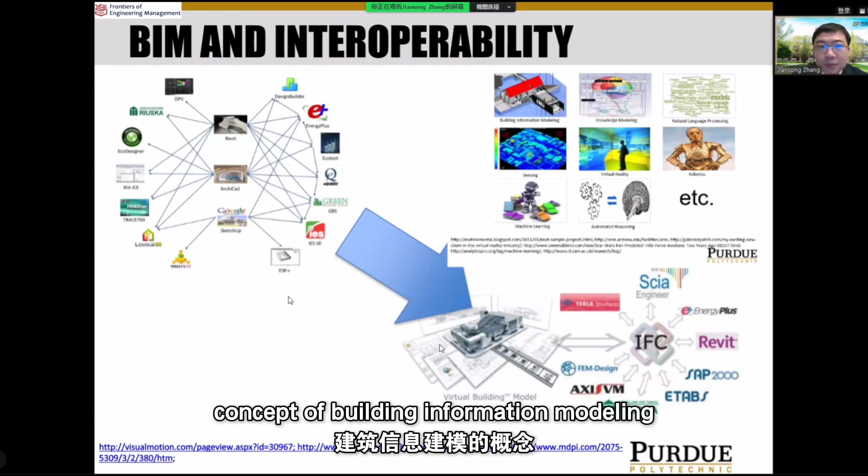And for the problem that we are looking at, we are probably all familiar with the concept of building information modeling, or have heard about it, or used it at a certain point in our work. The idea of BIM is that it was by design comprehensive. It's supposed to support the collaborations between many different stakeholders, and therefore the interoperability of building information modeling is key to the success.

However, in reality, there is really a lack of interoperability when it comes to the transfer of models between the software provided by different software providers, which can easily cost our society billions of dollars, because there needs to be a lot of manual effort that goes into fixing the model, finding missing information, or even creating the model from scratch, right? So this is a big problem.

And one important observation of the problem is that it will be very difficult or even impossible if we rely on the industry itself to solve it. Just like the problem of the interoperability between the Mac computer and a Windows system, right? There is a tendency, just by nature, that they don't want to be compatible with each other.

So to push that forward, the industry formed an alliance, which later became what's called buildingSMART. And buildingSMART has published the Industry Foundation Classes as the standards, right, to help with BIM interoperability, which is great, and which is considered to be the most promising solution by most of our community members. However,

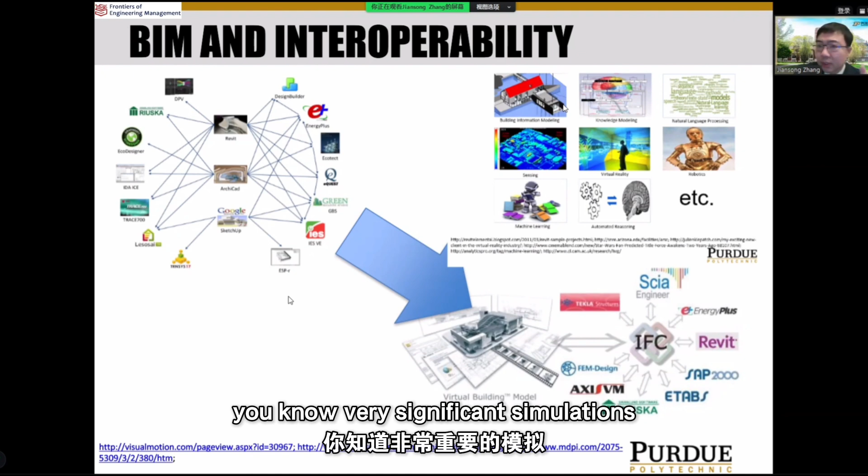And if we look at the future of our AEC industry, there are many technologies that are going to make our industry much more intelligent and autonomous, right? Such as robotics, sensing, and AI, which is a huge trend right now. And in my vision, all of this needs to be organized by building information modeling, because this is the essential model. Just like in Professor Gong's presentation earlier, you have seen a lot of very significant simulations. But when it comes to the infrastructure side and the building side, all the information is still supposed to come from building information modeling.

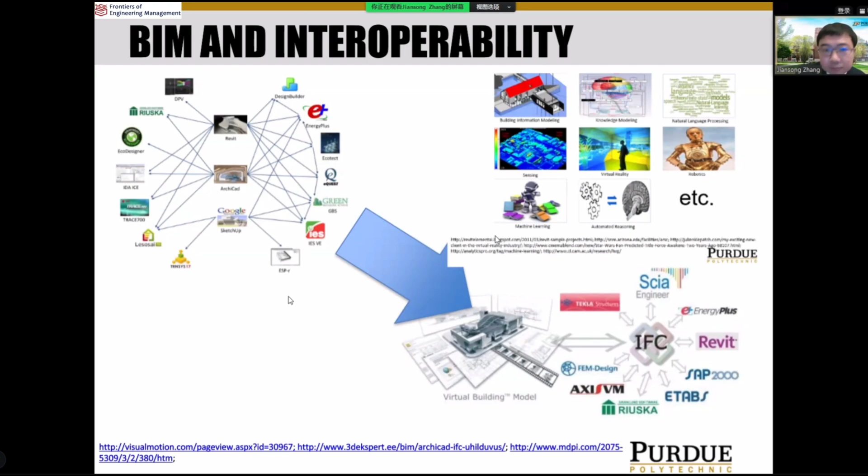So with that being said, let's take a look at some example IFC data, right? For those of us who are not familiar with IFC data, it's pretty much just a list of entities, where each line represents an entity, and each entity has attributes. And then if we look at the representation of the geometry, which is supposed to be the most mature part of the building information model, figure 1 here shows a representation of a line segment, basically, right?

And we all know that 2 points define a line, so this is straightforward. If you look at the IfcShapeRepresentation, it is calling #8430, which is the IfcPolyline, which is defined by 2 points, right? #8428 and #8429. Then you have the coordinates of these 2 points, and this one is even simpler. It's 2-dimensional, so it's very easy to understand. But when it comes to 3D representations, it can be a little more complex, right? Figure 2 shows a representation using what's called a clipping operation.

And this is, you basically take two 3D shapes and use binary operations such as union or difference between them. So in this case, we have what's called an IFC Boolean clipping result. And it is using two solids, right? So one of the solids is called an IFC extruded area solid.

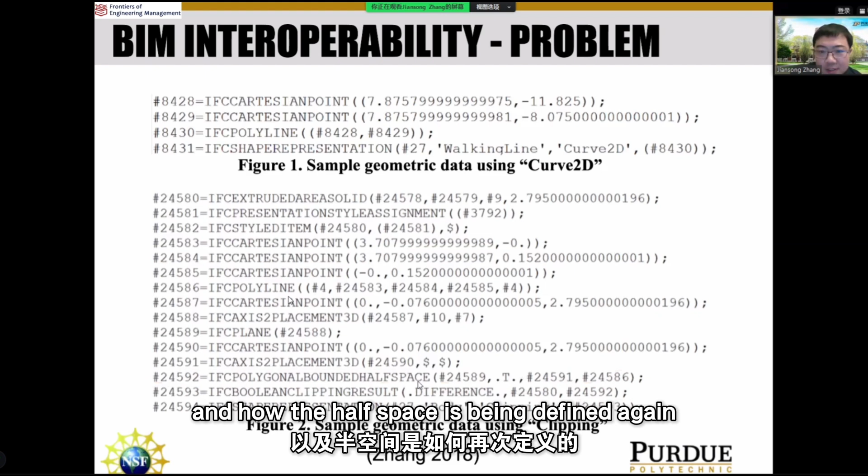So the other 3D shape here is what's called a polygonal bounded half space. Now it's becoming a little more interesting here, because as the name suggests, it's a half space, right? Just imagine, so it's infinite, okay? So half space. And how the half space is being defined, again, oops, wrong direction. So here's a figure to help us understand.

So basically, you take a plane and you cut the whole universe, the whole space in half, right? You get two halves of that space. And then you have a polygon that helps you define the boundary of the 3D shape that you want to define, and an origin that helps you place that half space into the coordinates.

Okay, so in this case, it is using this IFC plane to represent the cutting plane to cut the whole universe in two, and then it is using this what's called IFC axis 2 placement 3D. Again, this is a very classic representation of the placement and orientation in the IFC paradigm. And then the IFC polyline is used to define the boundary of the polygon.

But then there's a fourth parameter, which is a binary parameter, true or false. And according to the buildingSMART definition, this is called an agreement flag. And they explained it as, if the agreement flag is true, then the subset of the half space, again, you're cutting the whole space into two halves, right? And then you need to select one of them to use in your representation.

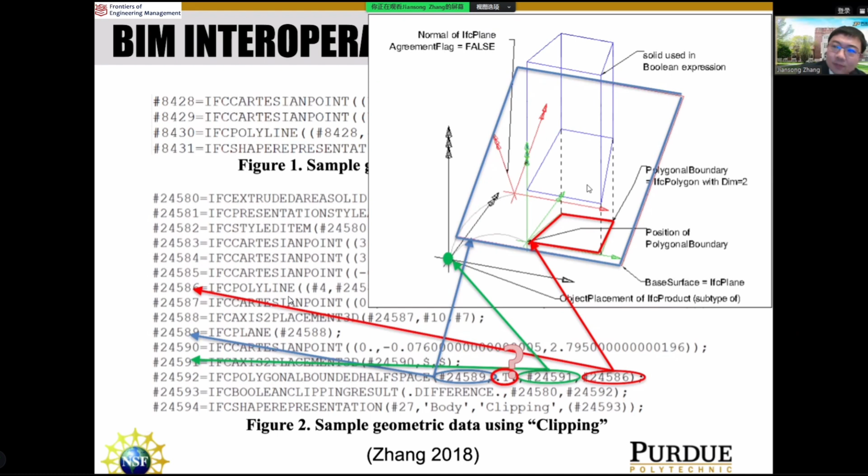Okay, so I hope the answer that you get is not clear, right? So this is a problem, because the true meaning of the agreement flag, although they have clearly explained it in the specifications, can still have ambiguity and unclarity, right? So, for example, normally true is used to refer to the positive case, right? Such as the direction the normal points into.

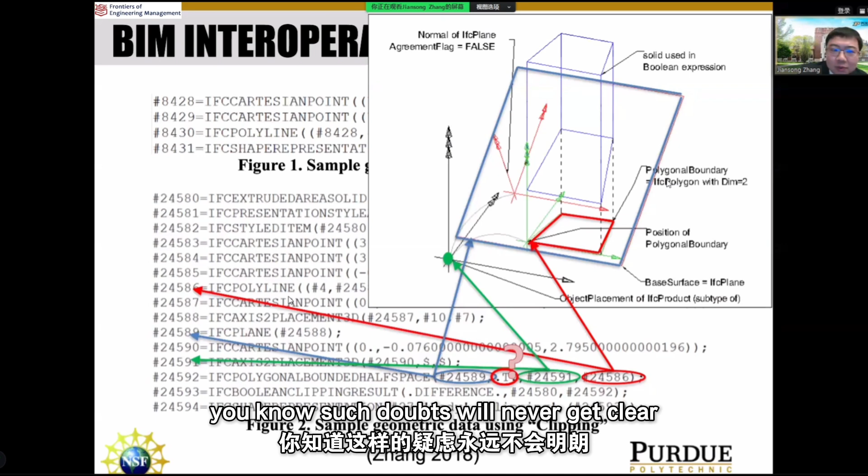But the potential ambiguity of the away from is caused by the unbounded nature of a half space, because both the positive case and the negative case seem reasonable to say it is the one that the normal points away from. Considering that in the positive case the half space can be regarded as the departure of the normal, and without testing, such doubts will never get clear. Okay, so

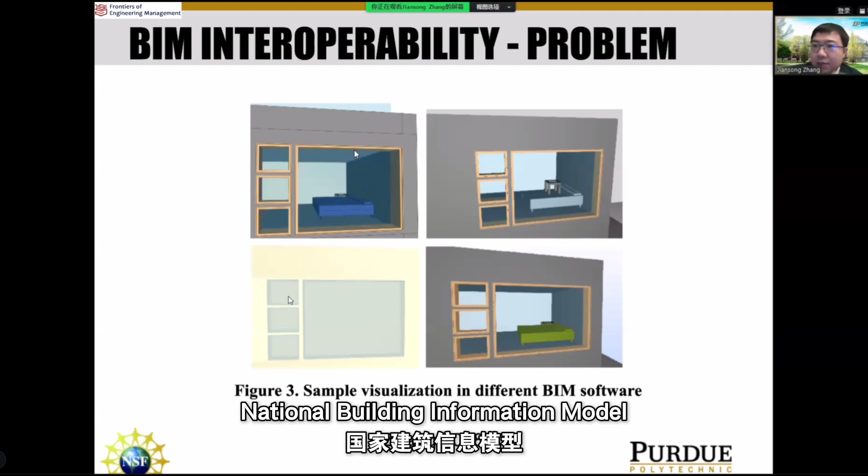another example that we want to use is in the visualization of building information models, right? So this is one model that we downloaded from the National Building Information Model Society or committee. It's an open access model, so everyone can download it for free. But when we open this duplex apartment model in different BIM software, you can see even the visualization of them can be quite different, right?

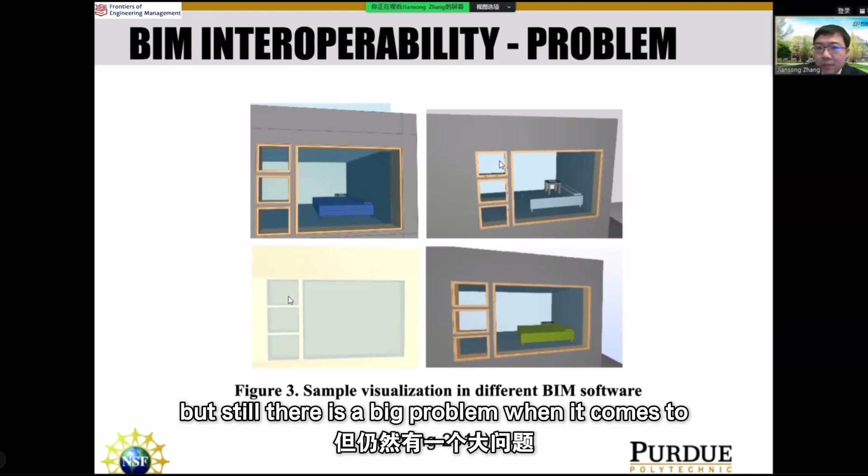Sometimes even the transparency of components may not show up as correct. So this was surprising because the geometric part was supposed to be the most stable part of building information modeling, but still there is a big problem when it comes to interoperability.

So what we developed a few years ago, we took the IFC data and the schema that was defined by buildingSMART and a certain level of due diligence, and we can produce a systematic understanding of the entities in IFC, which is the foundation for us to actually enable full interoperability, even if we are using IFC models, right?

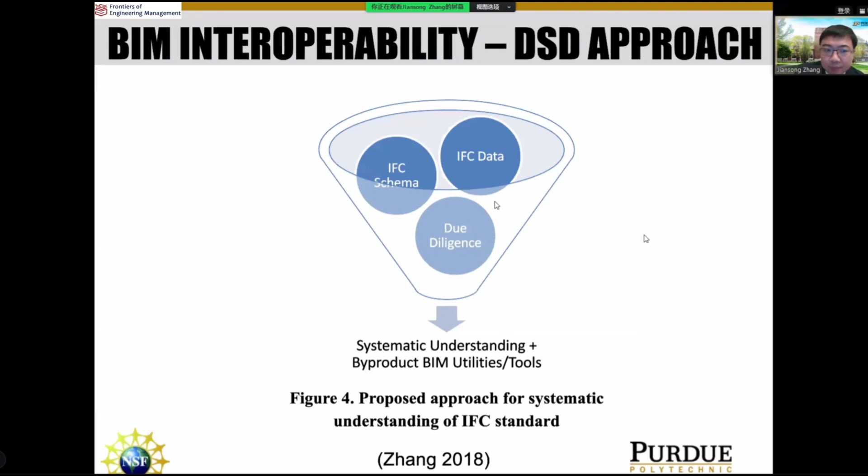And there are also side benefits. We can produce BIM utilities and tools. In other words, BIM software can be produced based on this method. We call it a DSD approach because it takes the data, the schema, and the due diligence.

So following this method, I took an initial try and found some very simplistic bridge models with piers and the deck, and tried to make sense out of the IFC entities that are representing the geometry and so on and so forth, right? So we start with this cone frustum shape of the bridge pier, and it was using the boundary representation, which is another type of classic 3D representation in the IFC paradigm.

So based on our understanding, we tried to implement a visualization algorithm that can help us visualize it. So you can see this is a comparison of a visualization of that cone frustum bridge pier with a commercial tool, the Solibri Model Viewer. This was our algorithm in Java language. The results are pretty good, right?

But not yet. When it comes to putting different objects together, for example, we realized, okay, the placement was not correct. And that was because we didn't implement the IFC Axis2Placement3D at that point. So then, this type of error caused us to look back at the data and further refine the algorithm.

So figure 8 here shows one example pathway of how the different IFC entities can be used, in this case, to represent the 3D shape using the B-rep boundary representations. I'm not going into detail, but essentially you can break down the 3D shape first to the surfaces, and then surfaces can be broken down to lines. Lines can be broken down to points.

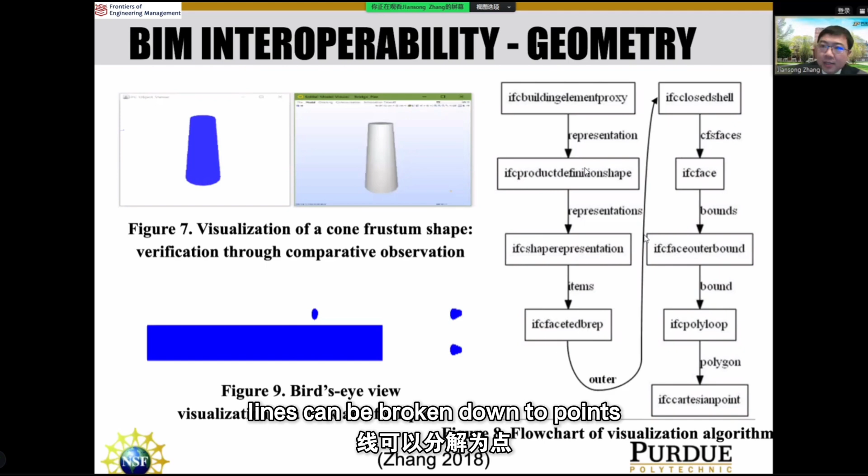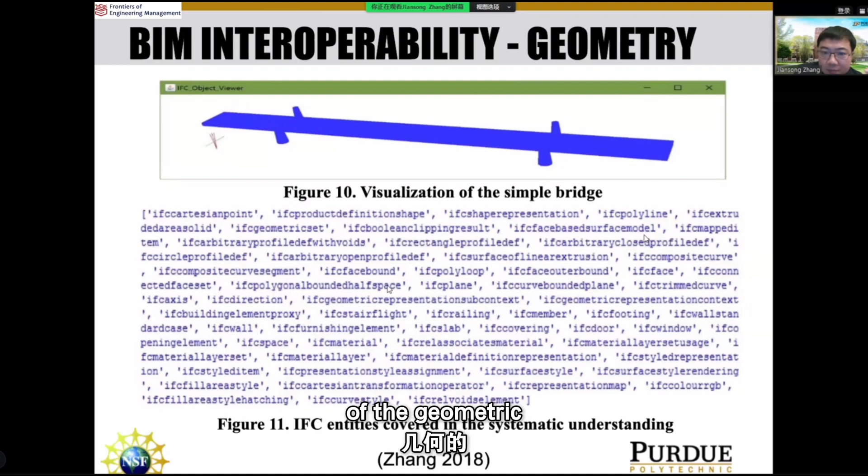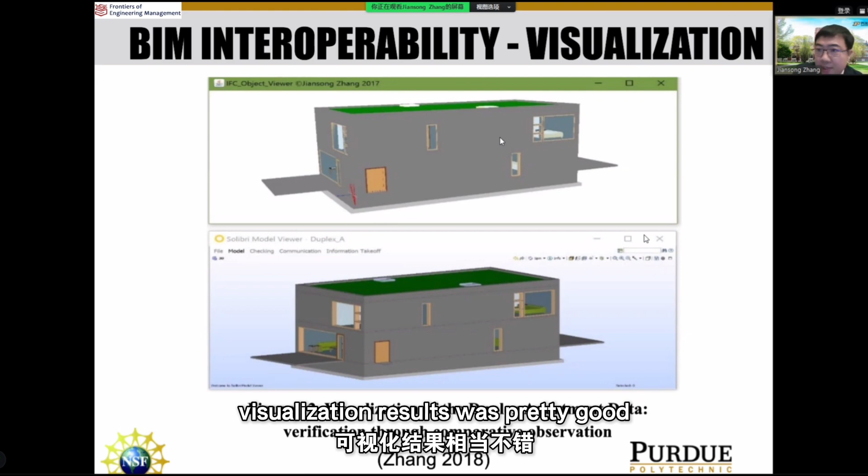So with that being said, we just refined the algorithm based on better understanding. Eventually, we were able to visualize this simple bridge correctly. And at the same time, we generated a systematic understanding of the geometric entities from the IFC data. And we also tested on this duplex apartment building. So as you can see, the visualization results were pretty good, and comparable to the commercial tools at that time.

So with that being said, now I would like to introduce the concept of invariant signatures. The idea is that instead of solely relying on a standard such as the IFC standard, we also need to look at the inherent features of an object, an AEC object in this case. And the three types of features that we focus on include the geometry, of course, geometric features, and then the location, the relative location. Again, think about the placement of the object in the space, right? And then the third part is the mechanical and the material properties.

So this is how we define the invariant signatures. We published in 2021 formally, but the idea had been conceived much earlier than that. We define them as a set of intrinsic properties of the object that distinguish it from others and that do not change with data schema, software implementation, modeling decisions, or even language and cultural context. So that means you can apply it everywhere, right? And it also should uniquely describe the object and provide all the information needed for various analyses.

Okay, so now just to show an example to help us understand the geometric features that compose the geometric signature, let's look at this cone frustum shape again. And how do we define a cone frustum shape? We can define it using these three rules, right? The first one, the top and bottom faces need to be circles, and the top and the bottom faces need to be parallel. And then the axis connecting the top and bottom faces should be perpendicular to the faces.

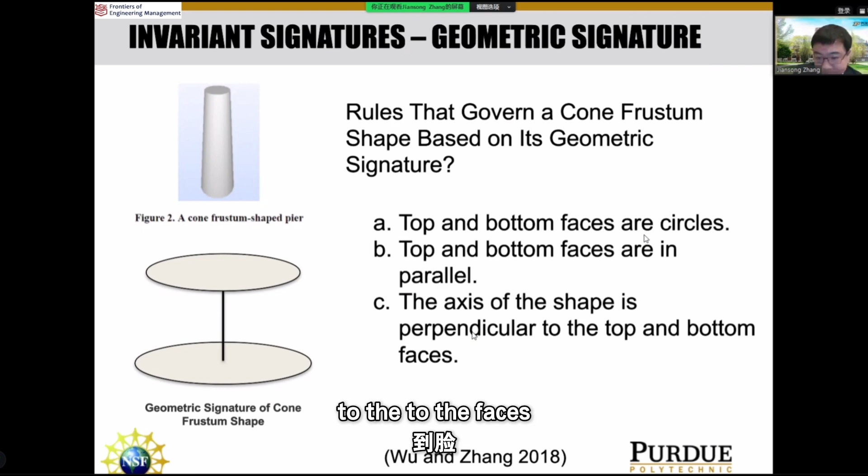And interestingly, in the practical representation in computer graphics in general, we don't really render the real circle because you would have an infinite number of points, right?

So usually what we render is an approximation, and a lot of the time we see a hexadecagon. It means you have 16 points used to represent a circle as an approximation. So in this case, we can check the distance between each of the 16 points and the center point, right? Theoretically, this distance should be exactly the same. But due to rounding errors in practice, a strict equation for the criteria would have failed, because you are never going to get exactly the same distance, right?

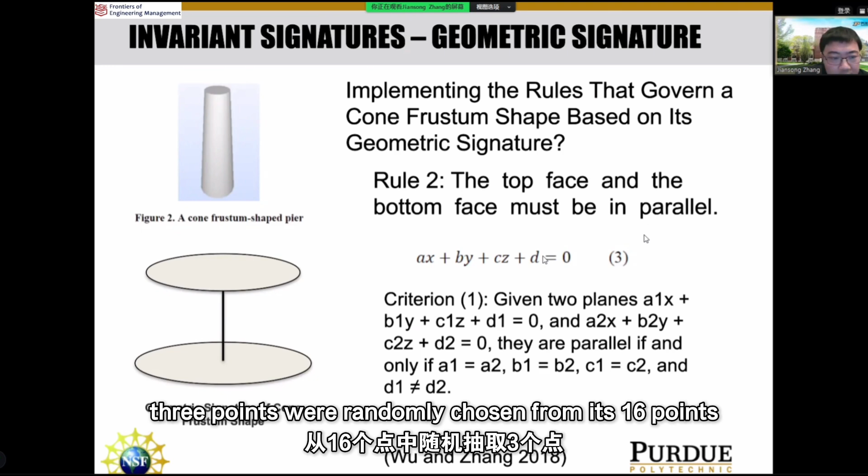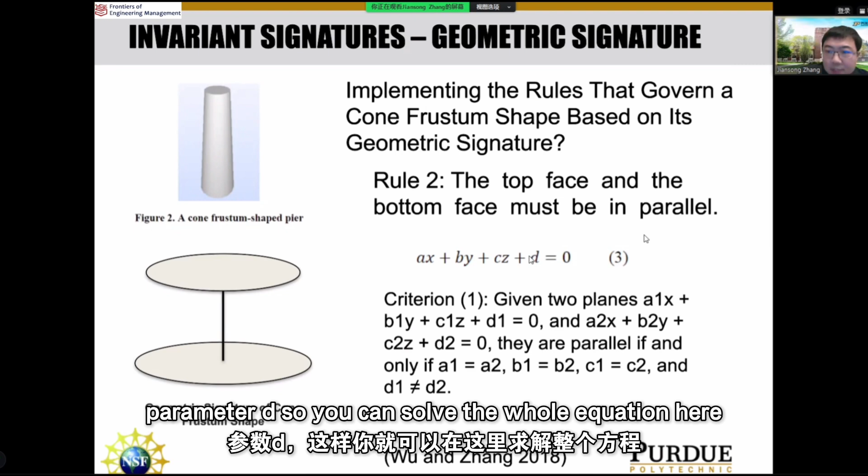And then to decide the parameters for a hexadecagon, again, a polygon with 16 points, or sides, 3 points were randomly chosen from its 16 points, and then the parameters A, B, C were solved by plugging in the coordinates of the 3 selected points. Plugging in the solved A, B, C, you can then solve the parameter D. So you can solve the whole equation here.

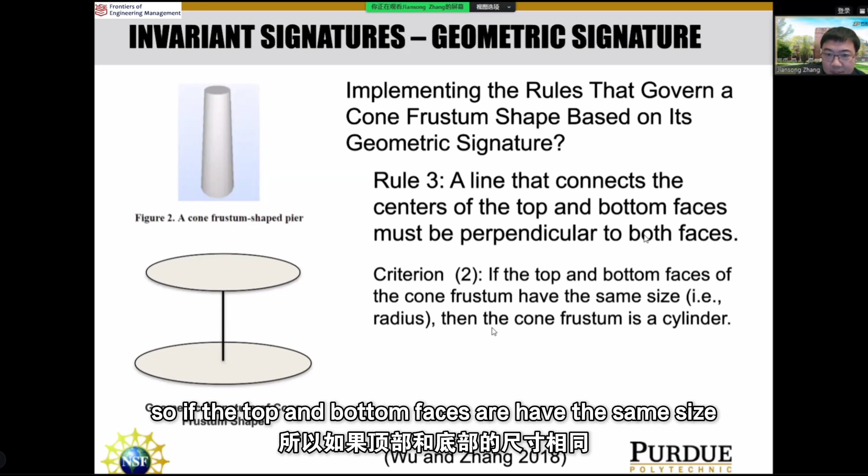All right, so now the rule guarantees that you have a cone-frustum shape; you don't want to exclude cone-frustum, right? So that is where the axis perpendicular to the bottom and top faces comes into play. And also the cylinder is a special case of cone-frustum, because when the 2 circles are the same size, you have a cylinder, right? And this can be further distinguished by criterion number 2. So if the top and bottom faces have the same size, then the shape is a cylinder.

Right. So with that being said, we developed the algorithm based on this invariant geometric signature, and we successfully tested it on 3 more bridge piers retrieved from online sources. An error tolerance in the equidistance check was decided by taking the maximum rounding error observed. Although it was tested to be successful on this data, it may not be the case for all possible testing data, because the rounding error depends on the software used, or the modeler, or the configurations chosen by the modeler.

In the ultimate classification algorithm that includes sub-algorithms for all the known categories, a good estimation of this error tolerance may be obtained by analyzing a large amount of training data. Also, the use of a relative value to represent error tolerance, in this case a percentage of a dimension of the shape, may be more robust than the use of an absolute value to represent this rounding error. So remember, we used 6 points after the decimal point, right? But this may also be dependent on the range of the absolute sizes of the dimensions.

For example, when you compare 2 data values that are close to 0, their relative difference can be large, while the absolute error can be small. The same rationale that applies in comparing the absolute value with the relative value also applies to relations used in the patterns of our sub-algorithms. Specifically, the relative relations are expected to be more robust than the absolute relations. For example, the parallel relation between the top and the bottom faces of this frustum shape is more robust than the absolute relation, let's say if we assume both of the 2 faces are horizontal, right?

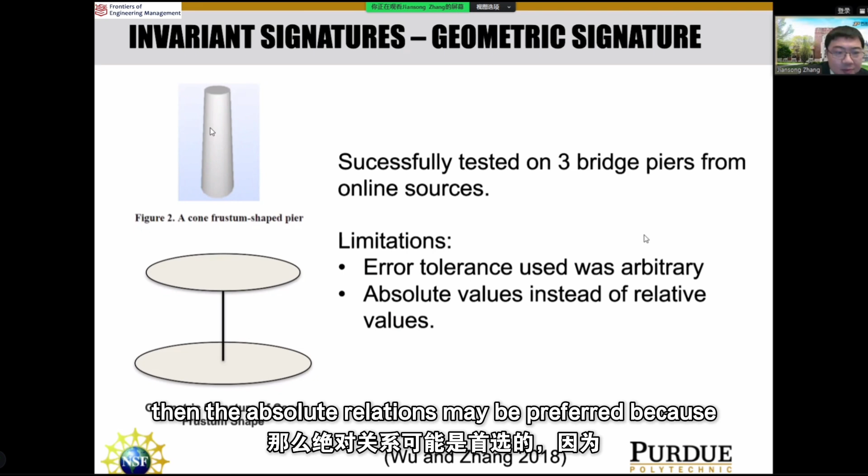But if certain assumptions are known to be valid, let's say the structure is standing vertically, then the absolute relations may be preferred because they're simpler to use. For example, if we assume that all piers stand vertically, just like this one, then it's easier to say that the 2 faces need to be horizontal. Okay.

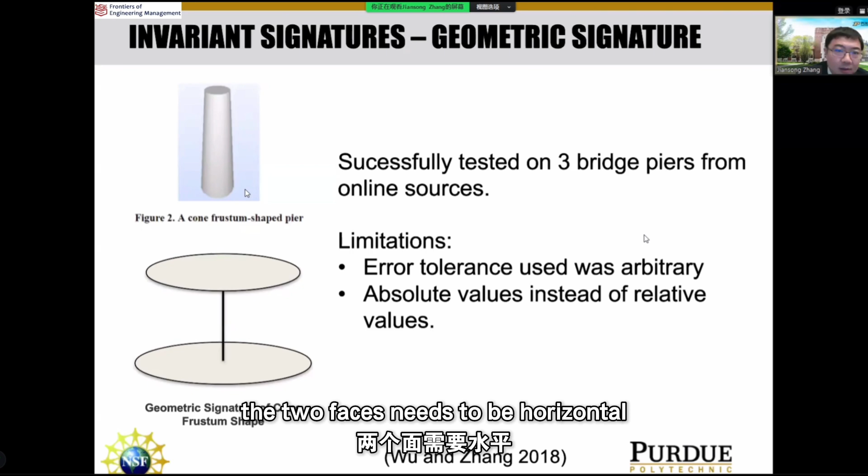And after the geometric signatures were developed, we extracted features of 1,252 object instances from our collected data. In addition to showing example use of the dataset, we developed a rule-based algorithm to do object classification, which we tested on 389 object instances from our architectural model. The algorithm used all the parameter values from the 14 features and successfully classified 336 object instances into the correct categories of beam, column, footing, slab, and wall. And then the collected and processed data we deposited into the Purdue University Research Repository, which is publicly available. You can download it from there.

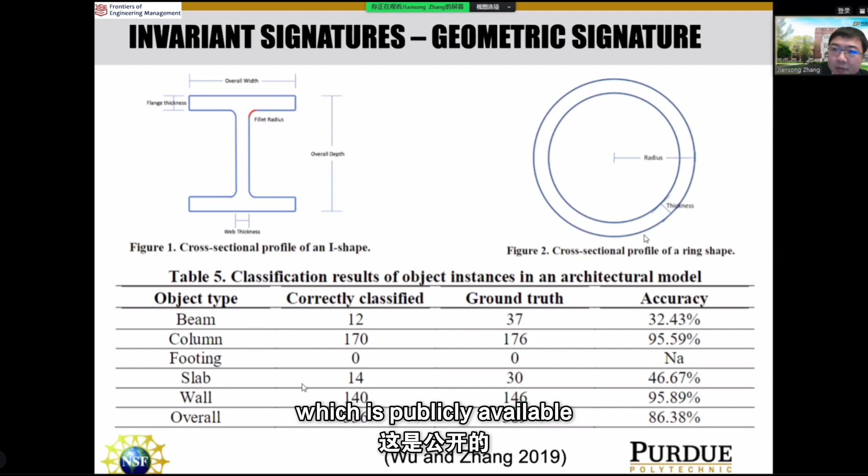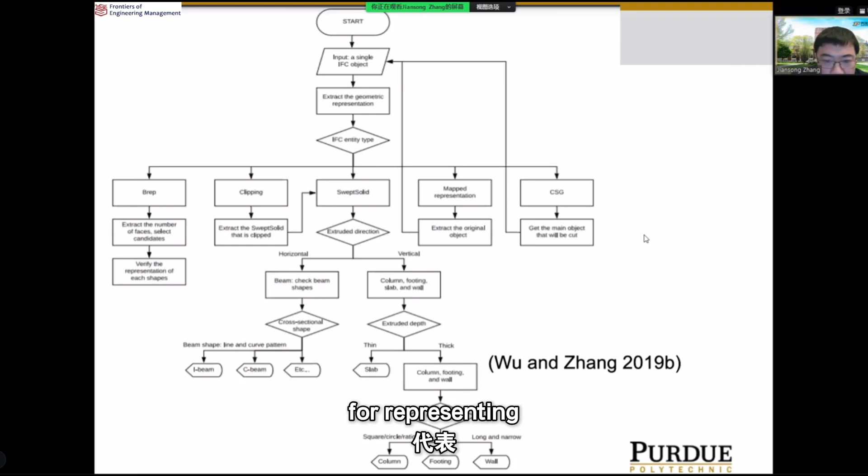Okay, so this is an example algorithm that we have developed for object classification into different categories, such as I-beam, C-beam, column, footing, wall, etc. We also developed algorithms that can classify the detailed types of beams, such as U-beam, C-beam, I-beam, L-beam, etc. These are examples that show the features from the geometry that we use as part of the classification algorithms.

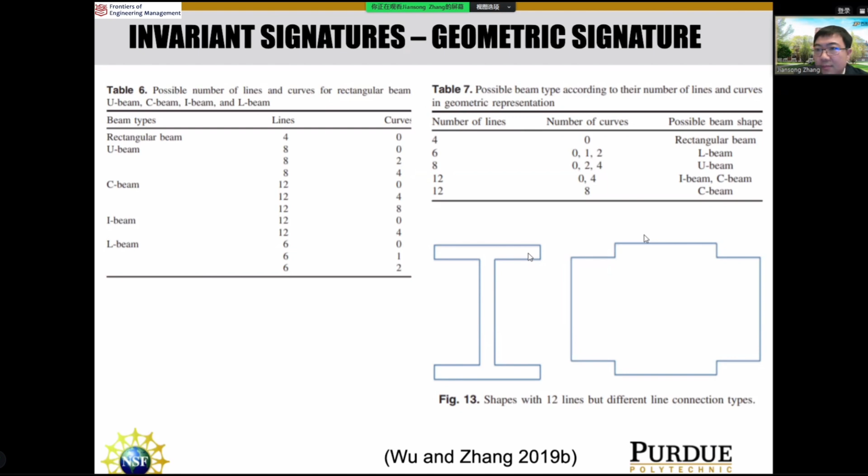Remember one of the features that we use is the turn direction, right? Which means when you walk through the contour line of this shape, at a certain point you need to turn, right? Let's say for this I shape, for example, when we walk from this point to this point to this point to this point, we turn right twice. But if we look at this shape, we start from this point, and here we turn right, but here we turn left. So that's an example of why we need this feature to distinguish certain scenarios. Because without it, these two shapes would be identified as the same by the classification algorithm. So that feature is needed.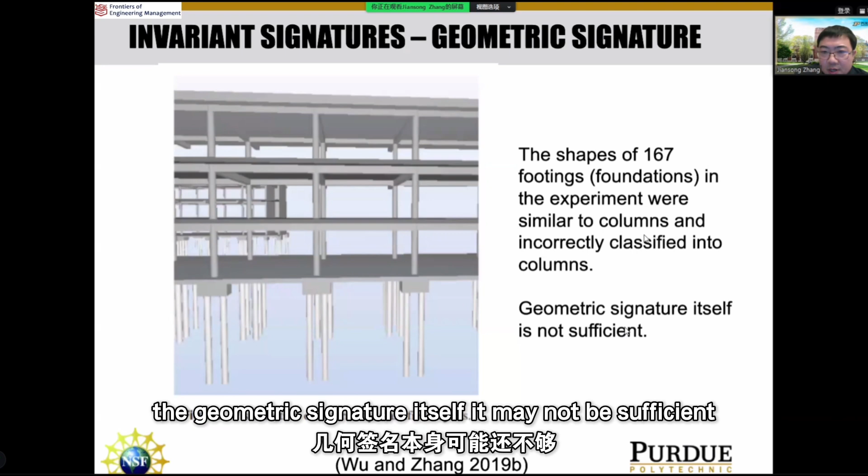So then we did error analysis. We looked into why these were the cases. The shapes of 167 footings, or foundations more precisely, in the experiment were similar to the columns because they are both cylinder shape, and therefore there were misclassifications. Which tells us the geometric signature by itself may not be sufficient. So then we added the locational signature. Remember, the second category of features was the locational information. So we added the locational signature, and that solved that problem perfectly.

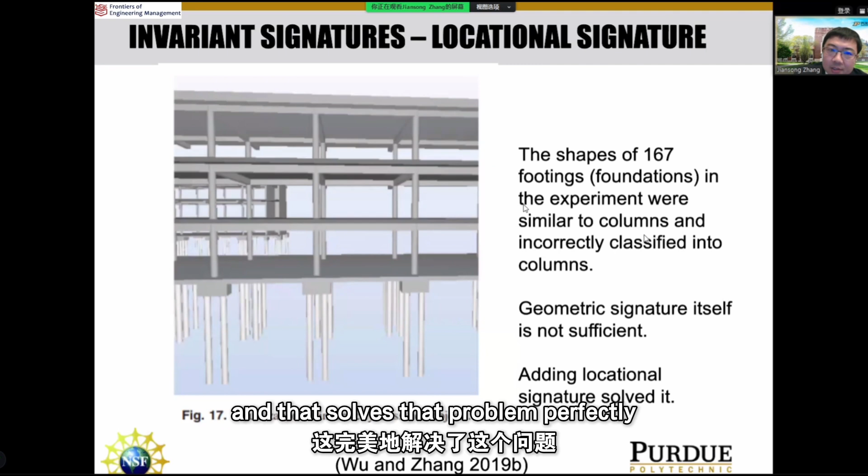So then we take the invariant signatures and start applying them to different scenarios. The first scenario we look at is the transfer of models between architectural design and structural analysis. In this case, we have two categories, geometric features and material features, and we just put the locational features inside the geometric features. And then for the material properties, we have the very classic ones like mass density, Poisson ratio, shear modulus, etc.

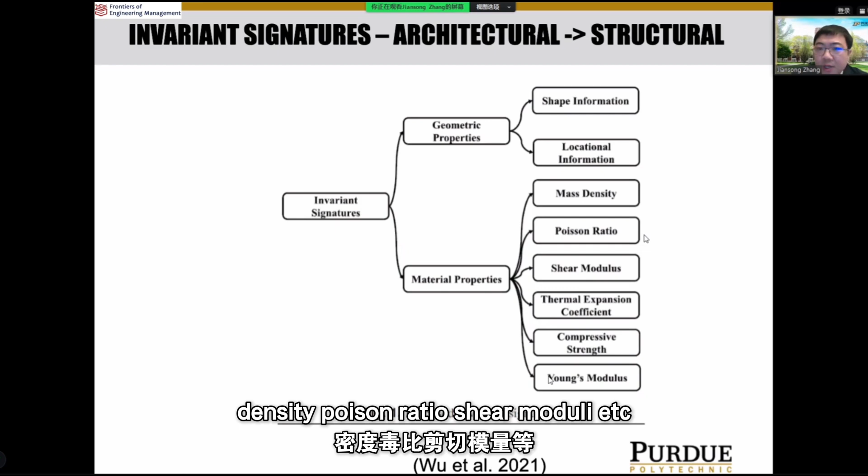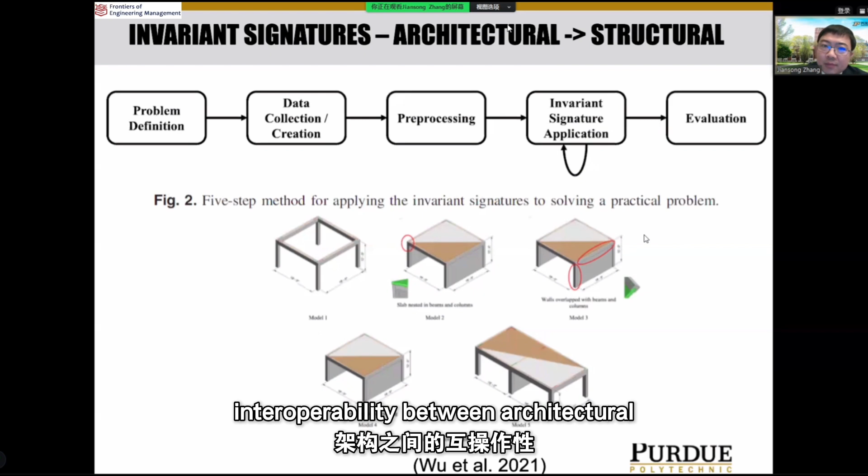And we devised the 5-step method for applying our invariant signatures to solving any practical BIM interoperability problem. So in this case, we're solving the interoperability between architectural design and structural analysis. So essentially, we need to collect data and then pre-process them and then develop the invariant signature algorithm iteratively, and then you evaluate the algorithm, right?

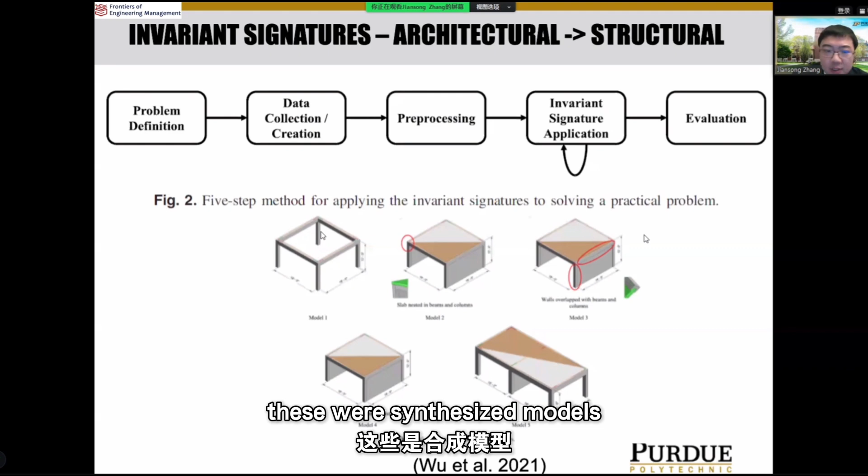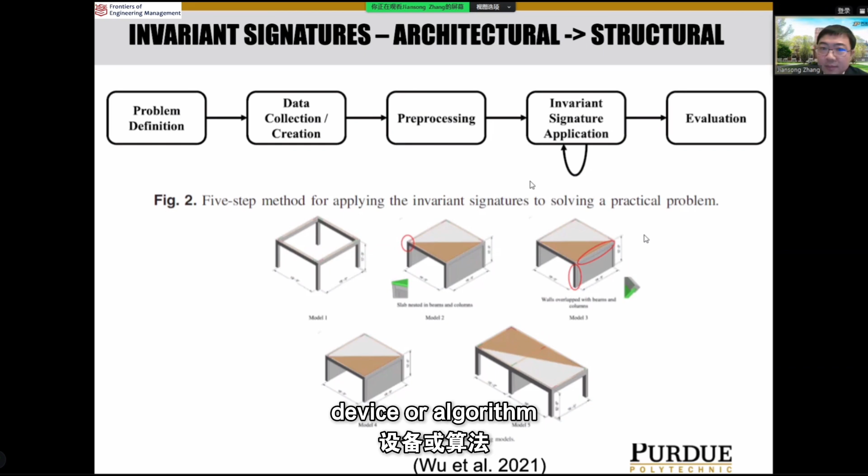So for this scenario, we developed these synthesized models. So as you can see, we have 1 bay or 2 bay with or without slab or walls that we created to help us devise our algorithm. And then we created slightly more complex structures for testing our algorithm to see if they can stand the test, right? So this is what the results look like.

So basically, for those of you who are not familiar with structural analysis, there are many different software that you can use. We pick STAAD. It's one of the structural software, and we selected it because it can take text data as input, right? So we can manipulate it or play with it. So in this case, we created a gold standard for our data, and as you can see, it's the one on the left-hand side, right?

So in order to analyze the structure, you need to define the structural model. So this is what the structural model definition looks like in STAAD. And the one on the right-hand side is the one that was automatically generated by our invariant signature-based algorithm. So as you can see, it's pretty comparable, right, to the gold standard.

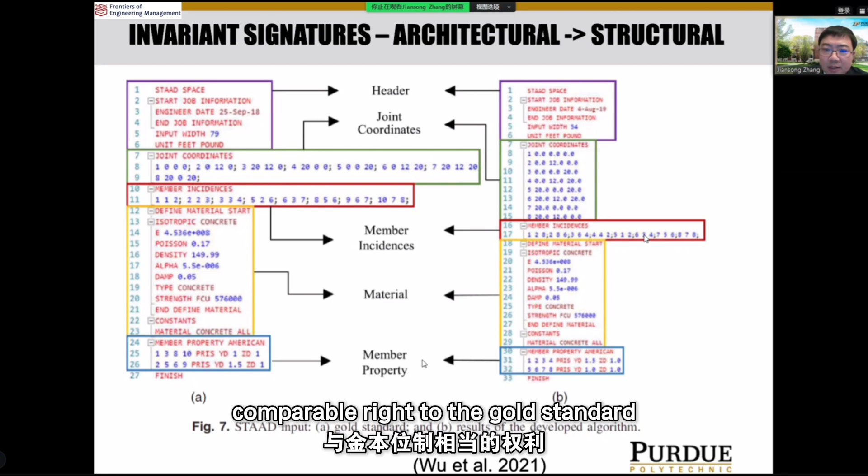And then we further tested on a real project. So this is a 2-story building with staircase and everything. So these are the results. As you can see, the results were pretty good. Overall, it has 98% precision, 94.9% recall.

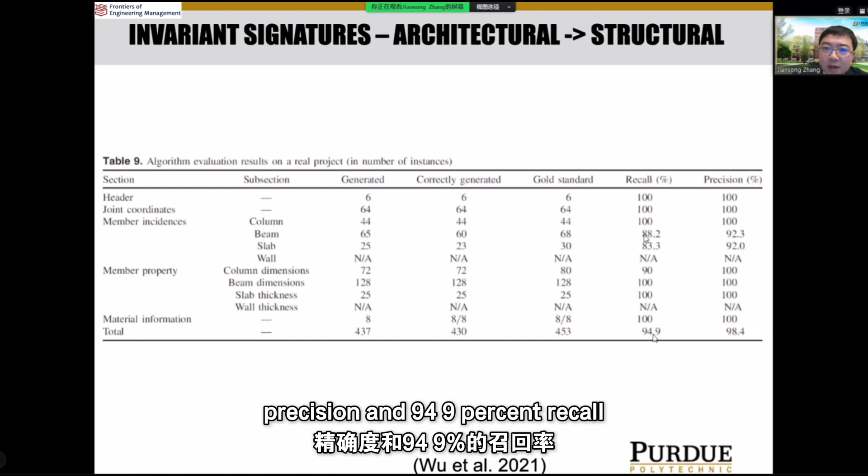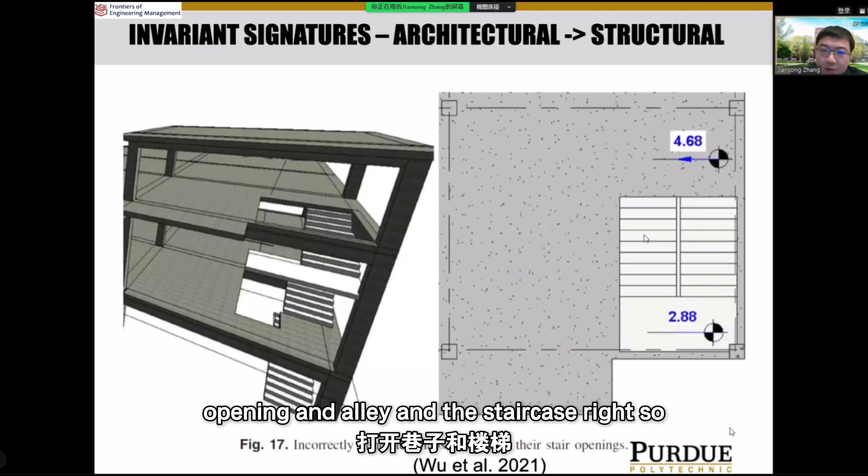But again, it was not perfect, so we looked into the errors. So, for example, there were some incorrectly generated slabs because our algorithm depends on the training data that we use, and the training data did not have such cases where you have an opening and a staircase, right? So it didn't catch that. But once we know this was the case, we can further integrate this case into the algorithm to solve it.

This is another example. When you have a slab that extends beyond the boundary of the building, the algorithm makes a mistake, which is okay. So now we realize it, and again, we put it back into the algorithm.

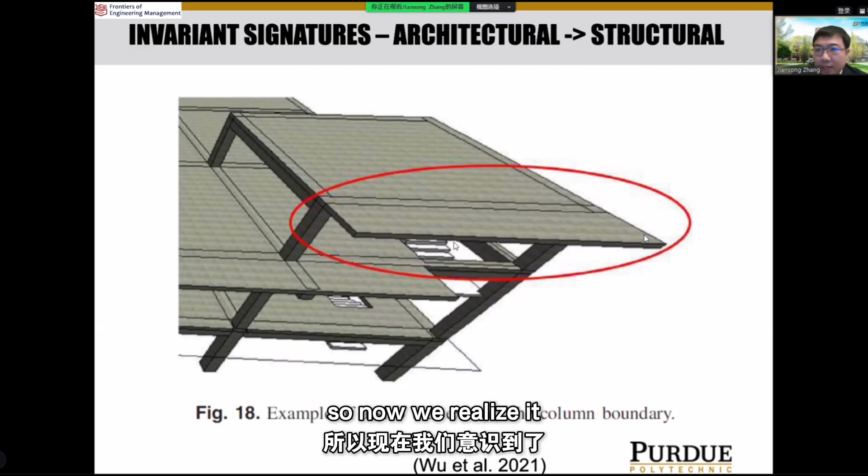So with that being said, we want to just summarize here. We have developed this invariant signature theory with initial geometric and material signatures that can be used to capture the essence of architecture, engineering, construction objects. We can use them in various engineering and management analysis and model exchange tasks. So this theory goes beyond the state-of-the-art of AEC information representation based on data schema and enables robust AEC information representation that can be regardless of software implementation, modeling decisions, and/or language cultural context.

So we advance the empirical knowledge also in the area of BIM interoperability by offering a new data-driven method to use invariant signatures for solving the practical problems in the BIM applications, so that we can support the many-to-one paradigm of BIM interoperability and bring seamless universal BIM interoperability one step closer to reality.

The theoretical and empirical knowledge in the area of BIM interoperability can support an improved model exchange between the different AEC processes. So in fact, we started with this architectural and structural scenario, but we already have done a lot of scenarios, such as between architectural design and quantity takeoff as part of construction management tasks, from architectural design to building energy modeling, building energy simulation, from architectural design to building code compliance checking, between architectural design and constructability analysis, such as modular construction or construction with robotics and automation, and so on and so forth.